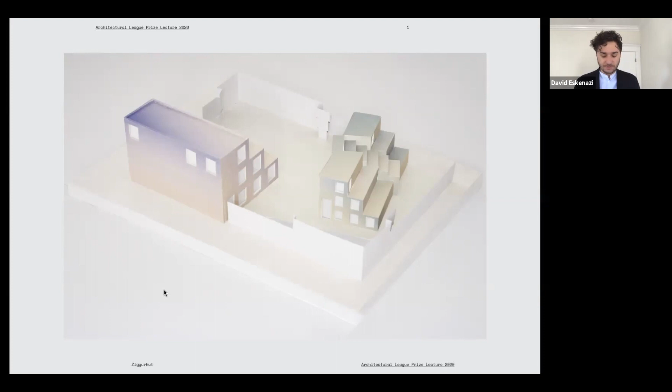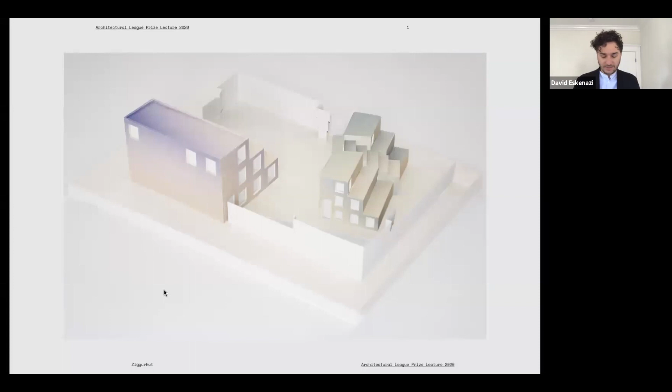The name Ziggurhut comes from the form of the ziggurats. In Yucatan, we find Mayan stepped pyramids, most famously Chichen Itza nearby. The step form is found in many diverse prehistoric societies, though only those in Mesopotamia are named ziggurats. The form interests me as a foreigner working in this area for its sense of universalism and specificity, the local and the global, and the sense of stepping as a kind of spatial ascension in a domestic setting.

The project began by thinking about the idea of scale in relationship to shape and human reference. Both houses are the same rectangular step form with windows and doors. In the left drawing, the houses are shown at the same scale. You can see that they're different sizes and that the windows are scalable, but the door, because it's specific to a human size, doesn't change.

On the right is a drawing showing the houses at the same size, drawn at different scales as a way to compare the similarities of shape in the sense that the door is size specific. This drawing I would call a zoomed working space, the space in which my practice designs. Human figures annotate the size while all things are zoomed to the same level.

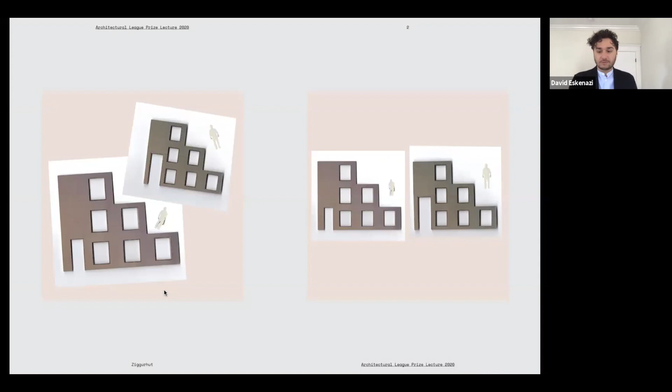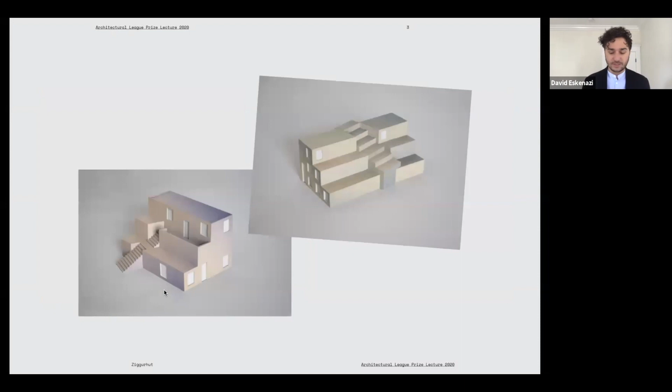Here are the two forms. The left is the main house, a two-story house that consists of a bedroom and living spaces, while the guest house on the right includes two bedrooms and a bathroom. They're both casually intersected by a stair. One stair you can walk up, and the other is a differently sized form of a stair.

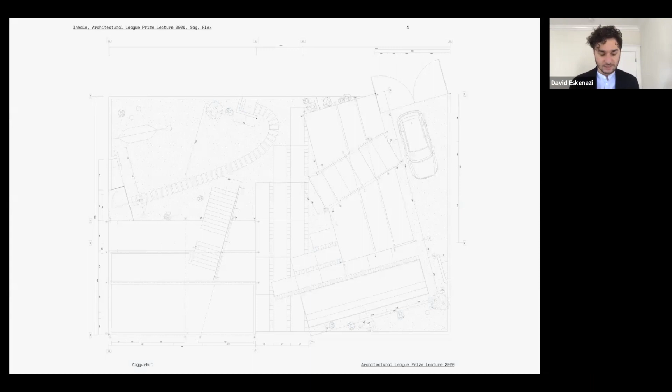Here in the ground plan, you can see the living spaces of the main house, the dining space, the kitchen, living spaces. You can also see in the guest house the two bedrooms and the shared bathroom. In the outdoor spaces, the pool, a space for outdoor dining, and a kind of garden in the upper left.

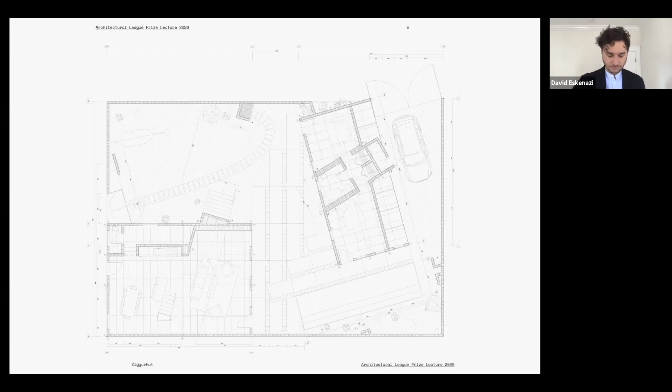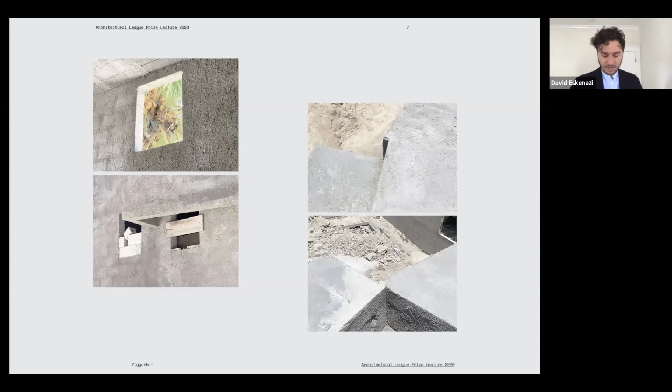The house is currently under construction. Here you see some of the details of the masonry construction. I especially love how the texture of the unfinished wall makes it seem woolly and soft in contrast to the exacting geometric intersections you can see on the right.

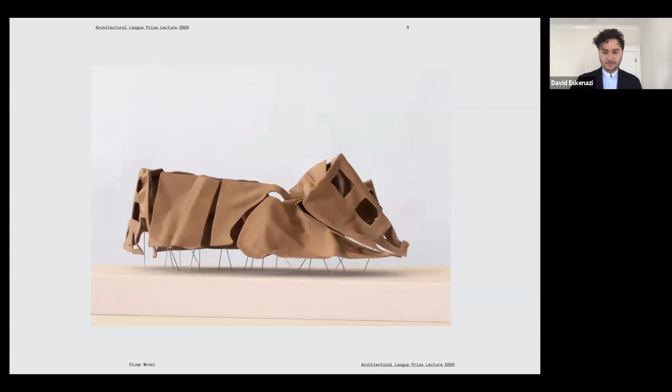While working on this project, I was invited to construct an installation at Woodbury University, where I chose to make a 1:2 scale model of the Ziggurat. This image is a photograph of a model built after the installation was completed, and I'll return to this in a minute. In thinking about the form of the stepped massing of Ziggurat, I thought of Robert Smithson's pointless vanishing point.

Smithson constructs a sculpture that reifies the three-dimensional space suggested by two-dimensional perspectival construction. The sculpture can be seen as a kind of material diagram that exists between the material, physical world and the conceptual space of a perspective drawing.

I thought that a model of the ziggurat would occupy a similar space, a material diagram, but I was interested in size, in the sense that Smithson's sculpture could be built at any size. Its physicality, while real, is not specific.

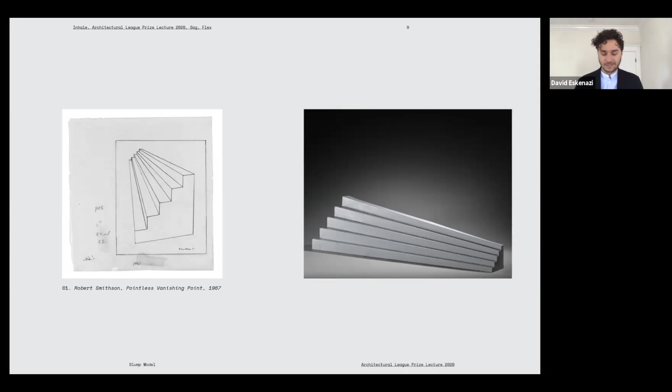We built this version of the Smithson sculpture based on the ziggurat, as you can see here, but now with a sense of specific materiality. It's constructed of loose kraft paper, letting it slump. Its form is size-specific and can't be scaled up or down. We named this installation Slump Model.

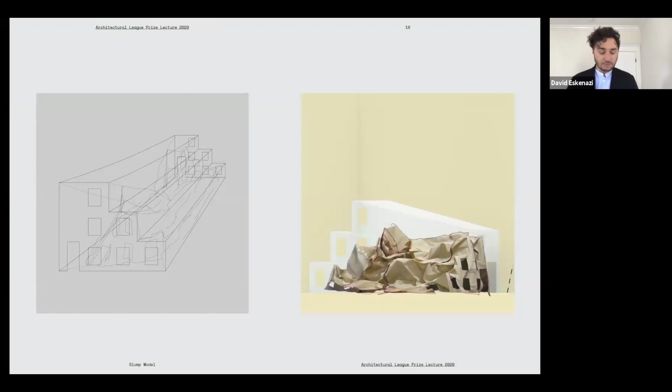Here are the different sizes of building the truncated step mass at different sizes of kraft paper. In the smallest on the left, you can see the paper generally keeps the precision of geometry. As the model gets bigger, approaching the size of the gallery on the right, you'll see the material lets go of its geometric rigor and slumps down.

In that version, you can really see how wild it gets. This is also the version where we add the windows and doors back into it.

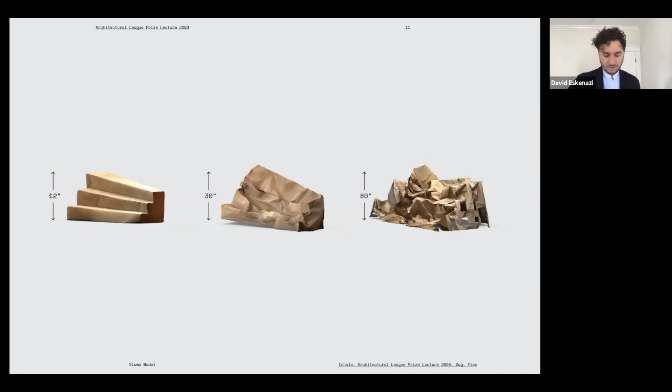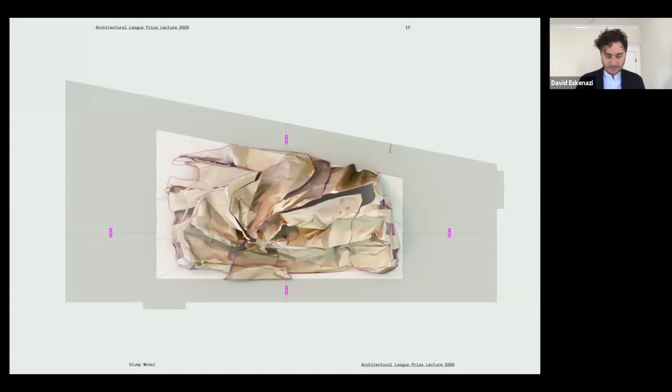The plan of the gallery at Woodbury takes after the gallery's name, the Wedge Gallery, which is a kind of perspectival construct. The model is formed to the plan and takes up as much space as it can while allowing for visitors to walk around it.

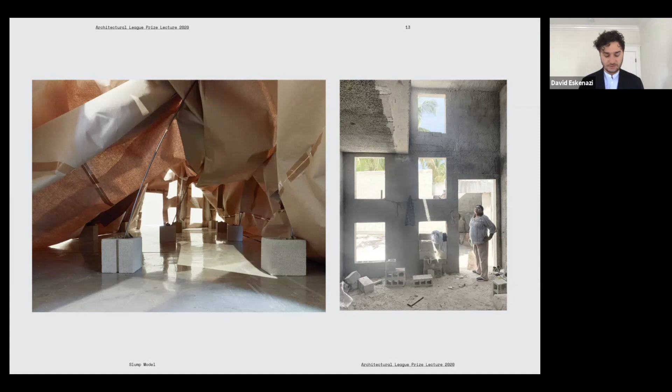This is the interior compared to a construction photo of ziggurat. There are tent poles resting in concrete masonry units that the paper rests on. In the back, you can see the smaller windows and doors, and it feels quite intimate compared to where the house kind of lands.

It recalls some previous conversations about paper architecture and the sense of the unbuilt in architecture as model. To me, this project opens up a new conversation within that world, one that suggests a closer look at the role of size-specific forms and the architectural models that would accompany them.

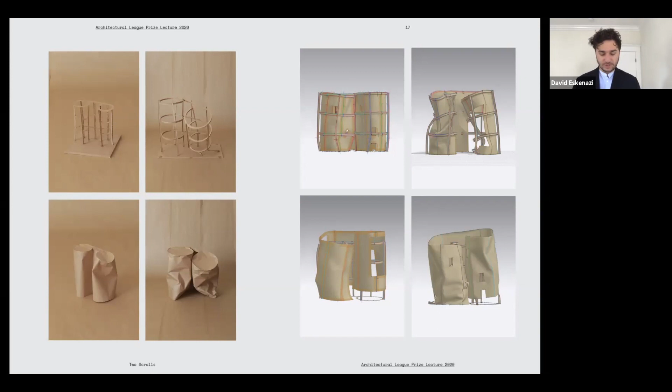Here's one attempt at putting all of these things together. This model is constructed of 3D printed parts from those digital physics simulations and from paper itself, which you can see hiding inside the model there. The windows on this model suggest that it represents a large building.

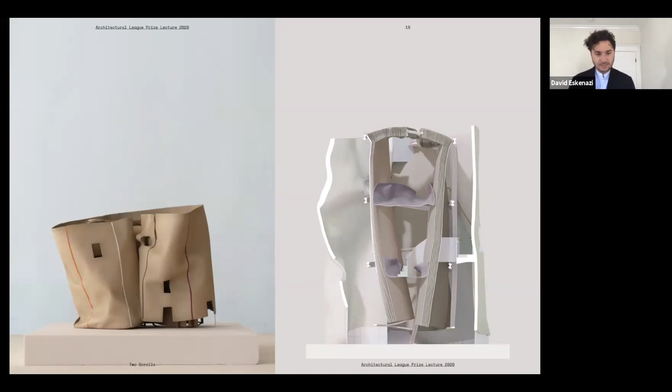You can begin to see some of the layers of this thing in the section here, which suggests stairs, floors, structure, and enclosure. In this alternate version, also made from those same tests...

we can see the same window is much larger, suggesting that this represents a much smaller building. Here, the exterior is an actual piece of paper, whereas the interior is a 3D printed simulation of a larger piece of paper. And in this section, we can start to see the stairs also seem much larger, but the elements of structure and enclosure are still present.

With the exterior shells removed, we can see that on the inside, the materials are reversed. What was paper on the exterior of the small building is a simulation on the interior, and vice versa for the larger building. These models are size specific. They can't be constructed at any other size, and their architecture is dependent on the performance of this model.

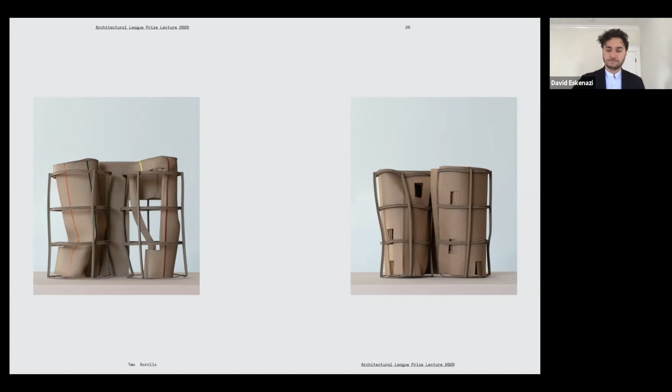I'll finish today just by showing some images from the online exhibition that you can find on the Architectural League's website. The exhibition shows a recent project proposal for a bathhouse in Los Angeles that builds on the ideas of this previous scroll project.

The project is titled Inhale, Exhale, Sag, Flex, and takes the form of two masses with opposing ideas of form and materiality. This exhibit displays a proposal for using city-owned lots in Los Angeles to develop flexible, easily fabricated public bathhouses.

The public bathhouse exists as an urban utility that produces an aura of collective imagination. Its primary function is to clean and relax bodies that are worked out in the city, but it's remembered as a space where foreign bodies care for themselves in a manner that is both personal and collective. Like the bodies within it, the bathhouse's architecture is continuously sanitized and maintained.

The proposal is composed of two buildings, the steam house on the left and the pool house here on the right, and they're separated by a stair. The steam house on the left, Flex, is enclosed by an expanding quilt of water bladders that fill up as steam evaporates and bodies exhale.

The pool house, Sag, is supported by a frame structure wrapped by building paper. The paper is periodically removed and dried once it's become too wet and soggy from absorbing pool splashes and shower steam. Both buildings are interior landscapes of curtains, pipes, water, steam, plunges, and bodies, where both architecture and people unrobe and collectively self-care.

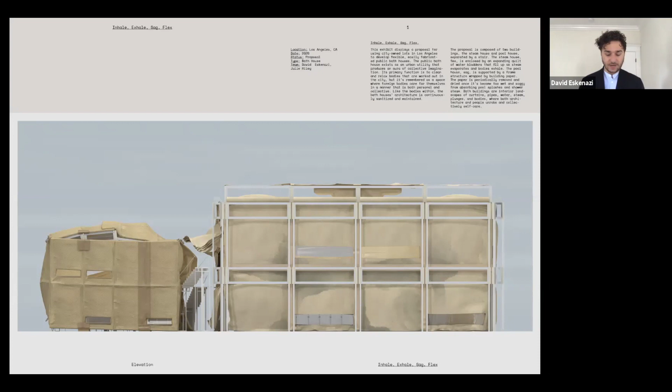Here in this section, you'll see on the left is, again, the steam house, and at its center is a large water bladder tank that contains all of the hot water for the building. It's expanding into the steam room above. And the enclosure of the steam house is also these water bladder tanks.

On the right is the pool house with a weight of water bearing down from its cold water tank on the roof and the pool on the second floor.

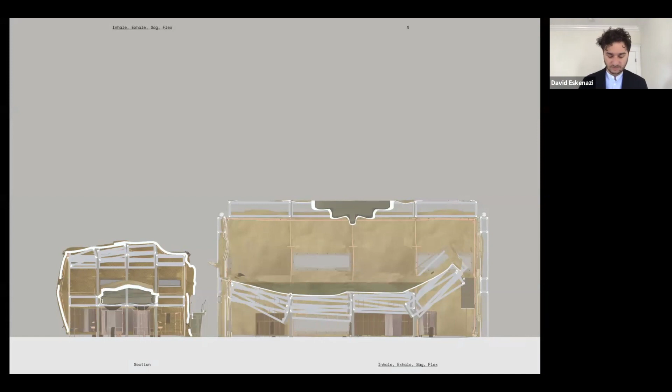Here is the ground floor plan. You'll notice there's no quote unquote front door, there's just an entrance to walk in. This is for the whole community. There's no permanent walls. Everything is thought of as material and infrastructure and is flexible.

Things are enclosed in curtains or through piping that might prevent somebody from walking through. At the center are the stairs and an elevator. And like I said before, the interior really produces a kind of landscape of showers, plunges, changing rooms, and toilets.

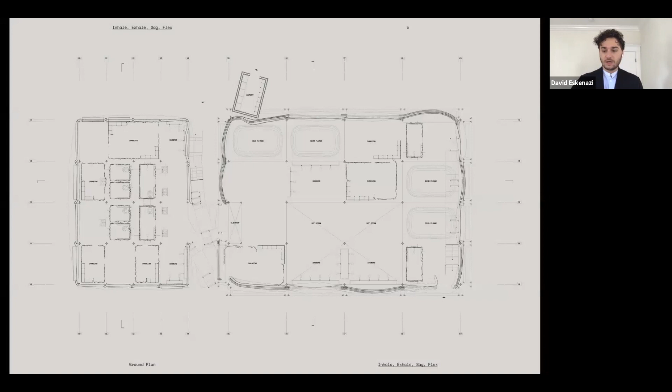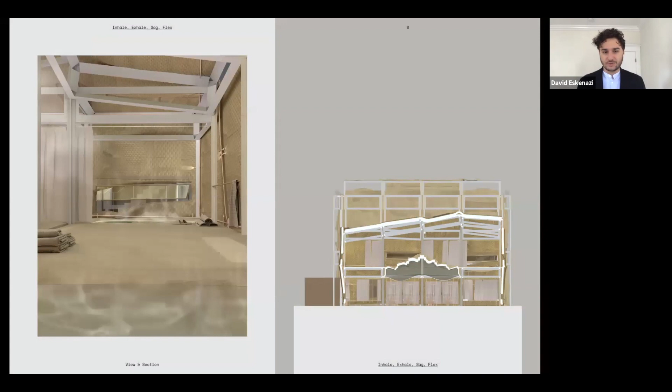So here's a view of the interior of the spa area. You'll notice the paper just kind of blends into the water itself, and the infrastructure, things like plumbing and electrical conduits are rendered the same way, and sort of construct a subsystem for enclosure.

In this section, you'll notice under the area where this perspective is taken is a proposal for changing rooms and bathrooms. And this is a view of the pool, which ends up feeling a bit like a beach. And again, in the section on the right, you'll see how the water's weight bears down in this pool house building called SAG.

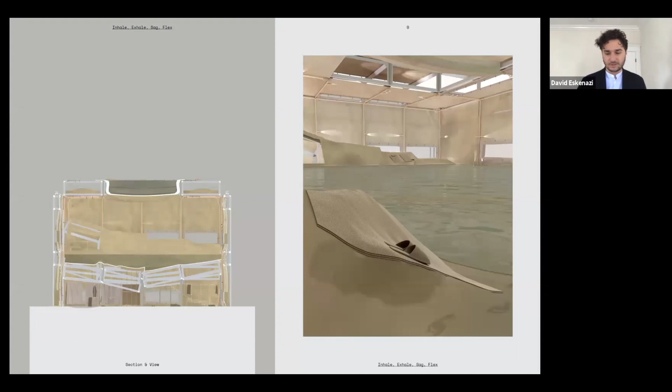These are some of the different infrastructures of the project, highlighting all the different material and structural systems. We also have some details we started developing for how we would construct this thing.

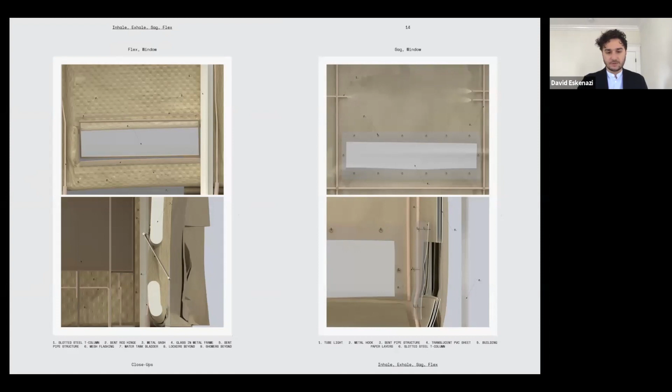On the right, for the paper, we would propose PVC plastic sheets that would cover the windows, whereas in the other building, we would have a kind of awning window that might swing.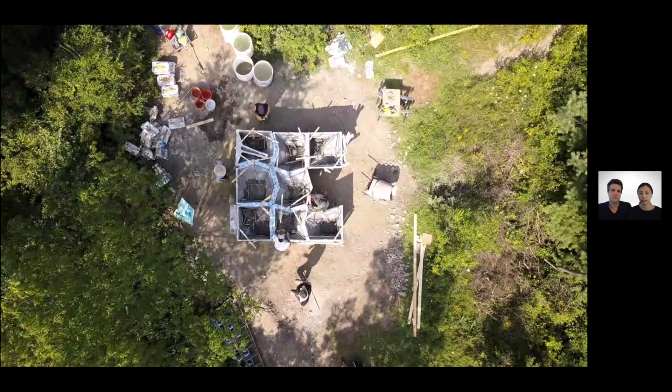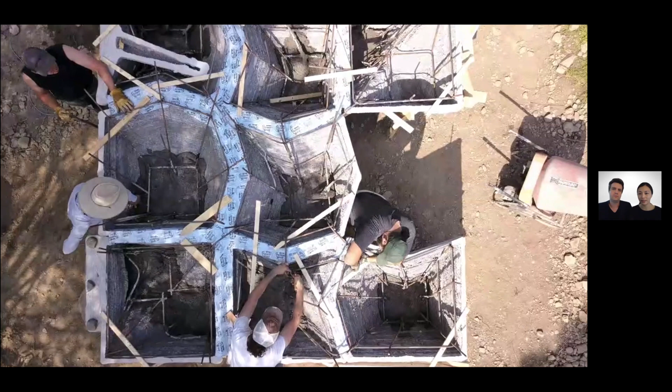At HANA, from the ground up, digital design and fabrication technologies are intrinsic to the making of our work, facilitating new material methods, tectonic articulations, environmental practices, technological affordances, and forms of sustainable construction.

In our research labs at Cornell, we build and embrace shared technology. In the past few years, we created open source construction machines, which we argue inevitably affect how we think and design through making at HANA.

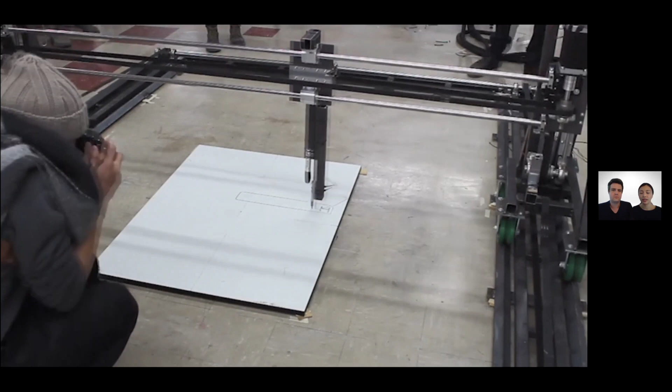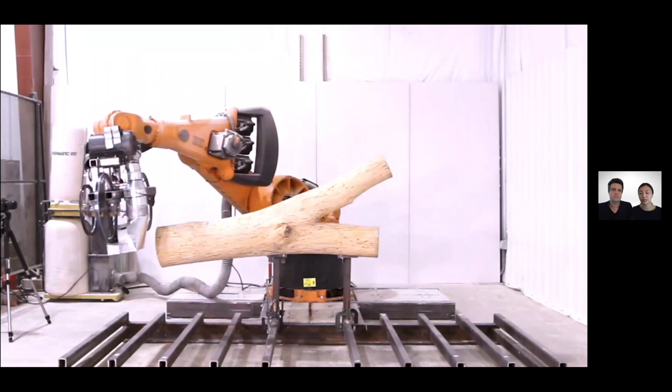In our work, we aim to mind the tension between machine means and architectural ends across scales. HANA does not obsess over technology for technology's sake. As designers, we consider ourselves to be biased generalists rather than specialists.

The various projects represented in this lecture inform form through a variety of methods of making, odd material applications, robotic routines, or socio-ecological narratives.

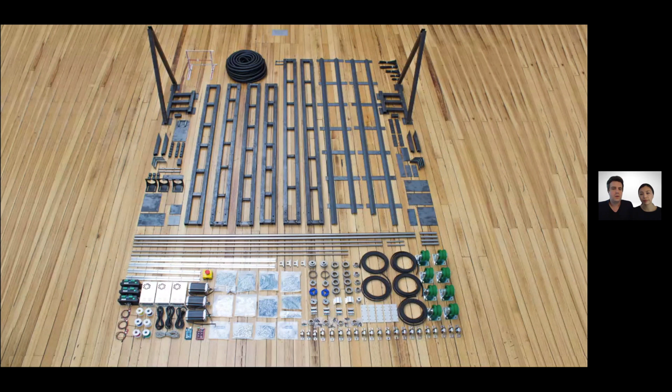We think that fully unpacking the manufacturing tool or machine is an exciting opportunity for architects to reclaim authorship over processes of construction, which fundamentally influence the way we can build, or perhaps ought to build, in the future.

While the machine is only a framework, our thesis is: with new tools come new architectural opportunities, not just in the research lab, but primarily in practice.

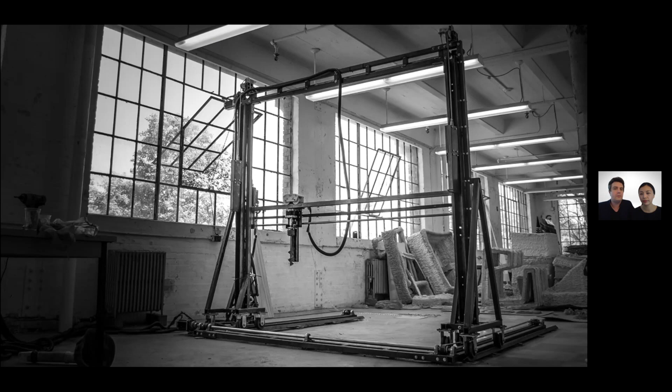However, in order to conduct research in advanced manufacturing and engage new methods of making, one needs the facilities, the means, and tools to do such work.

In 2016, we designed and developed a fully open source 3D printer at the Cornell Robotic Construction Laboratory. The printer cost about $6,000 to make and is now able to print full-scale building components in foam, recycled plastic, and concrete. For us, access to the tool opens the door to novel and unfamiliar architectural speculation.

In 2017, one year later, we purchased a 15-year-old used KUKA industrial robotic arm for $8,000 on eBay. The robot was formerly welding cars for GM at a manufacturing plant in Louisiana. And as with the printer, a certain amount of hacking is required to prepare this robot for architectural production.

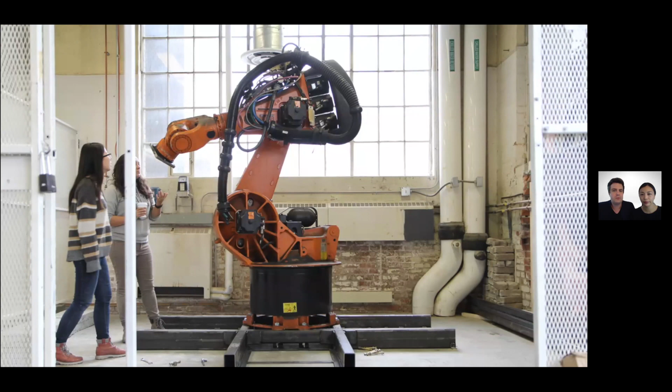Following principles of open source community information sharing, we believe that new technology comes with a social responsibility to make these tools broadly accessible to everyone. All information on how to replicate our tools is available for all through the Open Source Factory platform on the RCL website.

Our tools are never finished. They are constantly evolving with the architectural experiments we undertake at HANA. It took us about 3 months to develop a material mixture for concrete 3D printing.

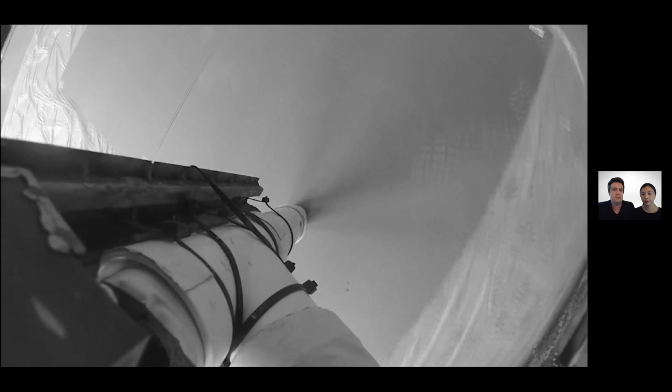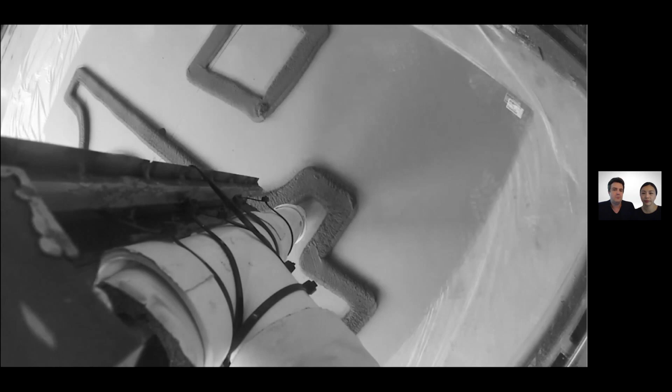And during this process, we discovered that the 3D printer, a machine which has long been characterized as characterless, because it can presumably print anything, is in fact exactly the opposite. It has plenty of character and a multiplicity of what we like to call productive constraints. Most of those constraints are informed by concrete rheology and gravity, which both became our printing frenemies.

Here you see a video of our first printing process, which we've done in the lab. You see that the machine essentially prints one layer after another. It's a kind of three-dimensional drawing.

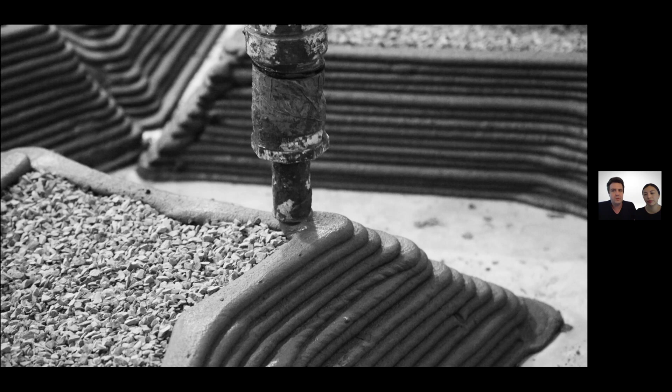In order to create three-dimensional form, the printer has to offset layers incrementally in a process very similar to structural corbelling. And this, of course, severely limits what we can print.

So rather than despair in the face of limitations, we see the manipulation of 3D printing rule sets as a tremendous opportunity to add design value. We think that concrete printing requires the development of an entirely new architectural language, which takes into account the limitation of the process as well as its performative advantages.

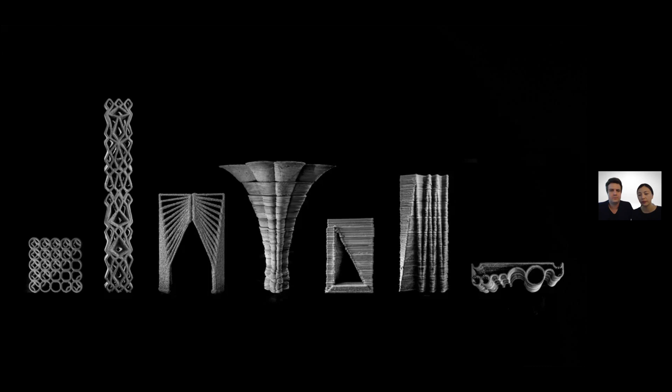So here in additive architectural elements, 3D printing concrete enables the elimination of wasteful formwork and prompts the reemergence of corbelling as an anachronistic structural strategy. For this project, we chose 7 prototypical architectural motifs to explore through the lens of the 3D printer.

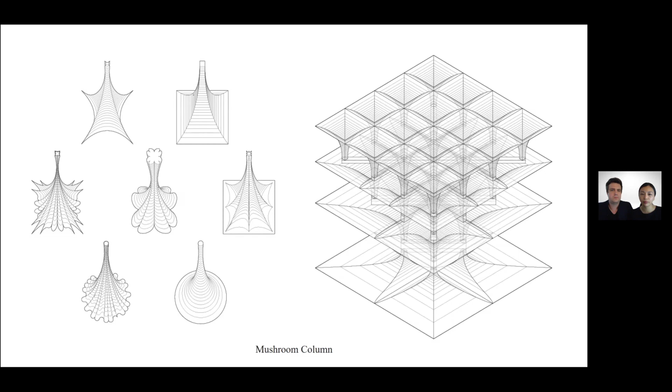Working first with the constraint of gravity, the mushroom column element embraces cantilever corbelling over support material by printing upside down, resulting in structural assemblies and horizontal striation that seamlessly transition between the vertical and the horizontal.

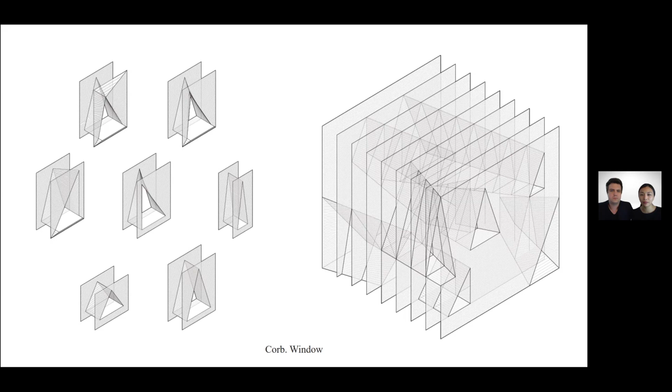We soon found out that the concrete printer cannot print in mid-air. Therefore, the simple task of creating a rectilinear window opening becomes seemingly impossible. In Corb Window, rather than drastically altering the process, for example stopping the machine to insert a beam, shortcomings become opportunities for design. So if you ask us, 3D printed windows have to be triangular.

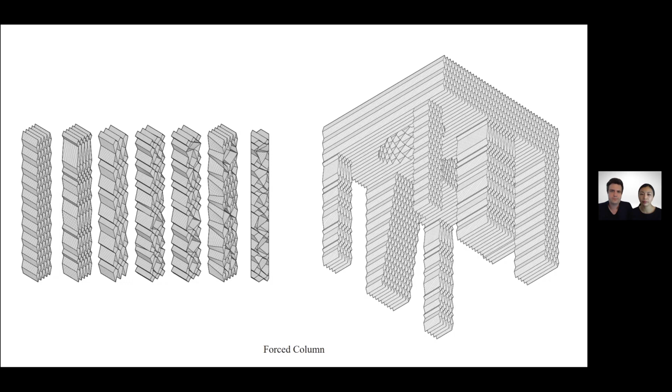The forced column element is printed in section, which allows for careful calibration of material densities and patterns. By depositing material where structurally necessary, the column can be optimized for forces and gravity, creating a type of transparent structural ornamentation.

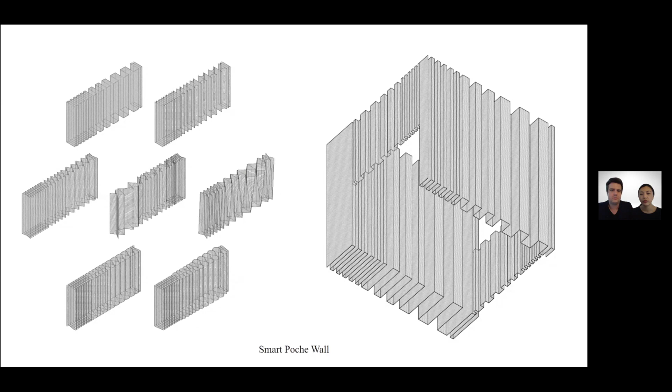Similarly, Smart Poche Wall explores a manipulation of concrete densities in plan, resulting in a wall which changes its composition based on structural, programmatic, or mechanical needs here.

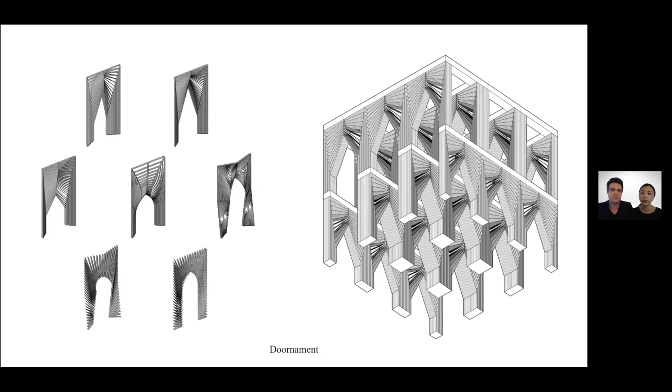The potential for excessive ornamentation is also investigated in the doornament, where the delamination of the layers you see here creates screen-like moments of transparency.

From a technical point of view, there is added economic and environmental value to 3D printing, which includes material savings, reduction of formwork waste, and the radical mass customization of components.

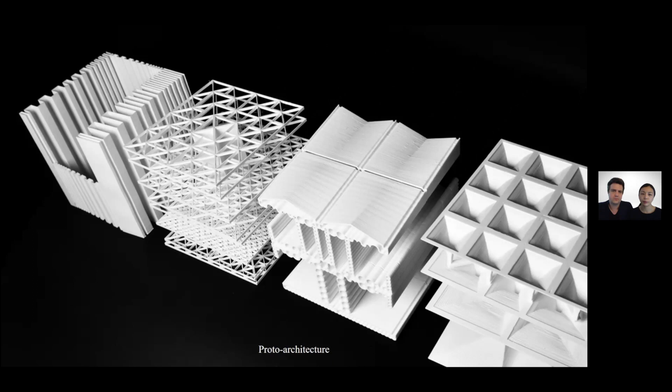However, there are severe shortcomings to working with concrete. The cementitious material itself has to change and become drastically more sustainable in order for 3D printing to become a viable future technology. While our concrete projects explore the benefit of 3D printing, we as designers have a responsibility to dig deeper and constantly challenge the materials we work with.

So jumping scale from building elements to furniture, our next project here takes full advantage of the printer's ability to economically mass customize geometries and create a range of tailored seats for a variety of body types. The Rolling Stones project is the winning design of the Folly Function competition in 2018.

The design is deeply informed by program, and in this case is public seating. The competition brief called for a design that could be movable by visitors and staff, but solid enough that visitors are discouraged from removing it from the park. So with concrete gravity working in our favor this time around, we had the second part covered from the get-go.

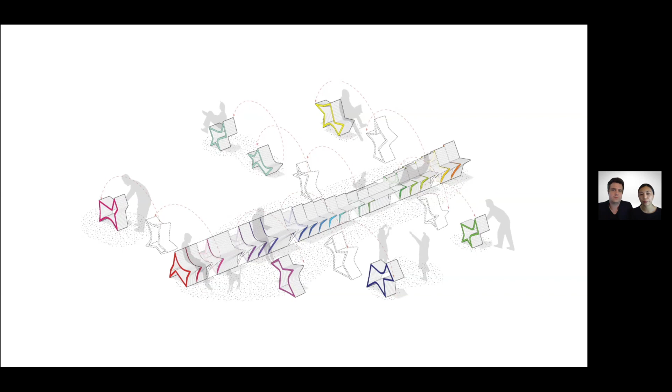Leveraging movement architecturally and its folly itself, the playful design encourages creative interaction and allows park visitors to discover a variety of seating configurations while moving the seats across the lawn. Responding to scales within the park landscape, the Rolling Stones can form long continuous bench, aggregate into smaller benches, or disperse to form solitary compositions.

And each seat has 3 configurations. Some enable a more upright seating position, while others animate lounging and relaxation.

In Rolling Stones, 3D printing with concrete enables the creation of 25 affordable and self-similar, but ultimately entirely individual seats. And no longer bound to the relentless paradigm of standardization, 3D printing opens the possibility for design freedom, customization, and individuality. As is evident in this photo, concrete is indeed hard to steal or throw.

So on to another type of loop. Environmental cycles, birth, growth, and decay are intrinsic to complex forest ecosystems and processes. Conceptually and spatially, the LogNog project references these eternal cycles and reciprocal relationships between systems, both natural and technical.

LogNog was designed in collaboration with Brian Havener at RCL and is a project that emerged from our first initial exploration with custom wood-based tools for the robot. It enables the construction of complex timber curvature with raw material and minimal formwork. In a reciprocal design process, the project fosters synergies and feedback between material, fabrication, digital form, and full-scale construction.

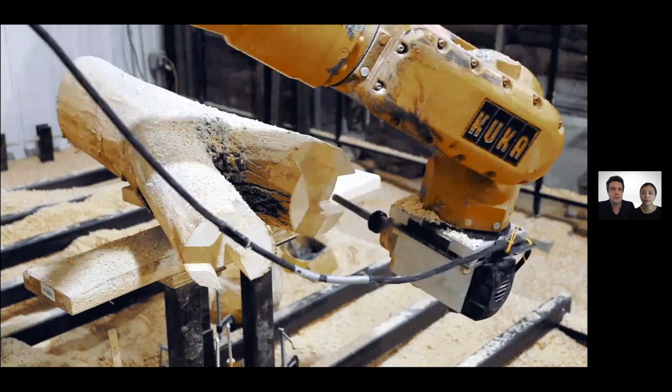Small roundwood members or tree forks are usually not used for construction because today's sawmills are not equipped to process irregular tree geometries. But with a robotic arm and 3D scanning, we can process irregular trees and roundwood members.

The mortise and tenon joints for LogNog are milled in 4 separate operations from rough pass to finishing cut, using both the tip and the side of the milling spindle bit. The project uses computation to optimize each joint for moment forces. While they all look the same, each of these joints is precisely rotated and calibrated to resist local torsion.

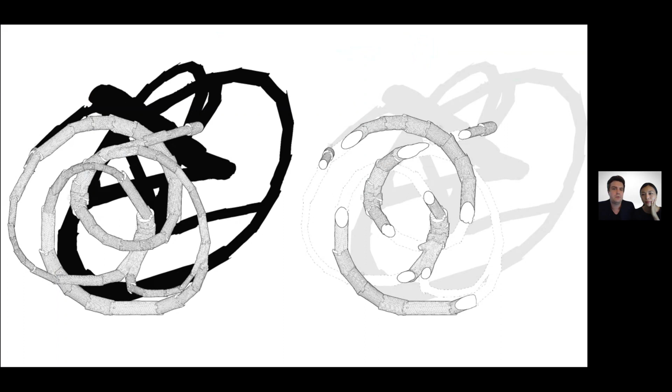Working with small budgets, we did not have access to heavy machinery, and therefore developed a self-sufficient construction method that requires minimal formwork or support during the construction process.

Unfamiliar notions of craftsmanship and precision, both digital and analog, emerge from LogNog's conceptual design practice and construction technique. By questioning how forests are used as a resource, LogNog provides a critical commentary on various perpetual wood cycles, economic, environmental, and cultural in nature.

Our last and latest project, Ashen Cabin, also has some similarities to the previous project and shares its forest heritage. That project follows two material narratives and is a culmination of HANNAH's applied design research as a critical practice.

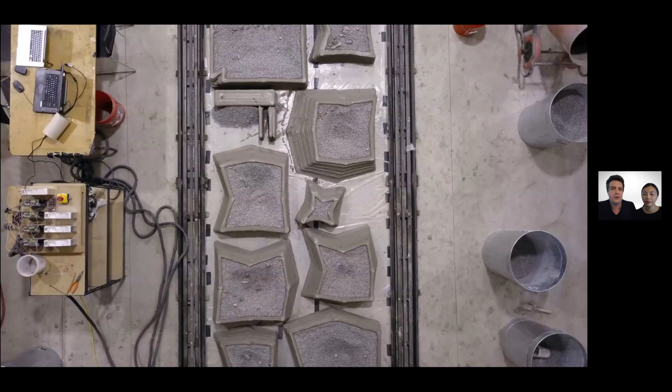In the first material narrative, the project aims to reveal 3D printing's idiosyncratic tectonic language by exploring how the layering of concrete and the act of corbelling can suggest new strategies for building. The cabin was built in two phases: in 2017 we did the concrete, and then in 2019 we did the second part, which is a wooden envelope.

The cabin is printed in components that function as sacrificial zero-waste formwork for the main structure, eliminating substantial construction waste. The formwork is printed in small sectional modules to be transported and assembled manually at the remote construction site. In this project, we developed a new building process reliant upon 3D printed formwork and cast-in-place concrete with custom rebar. Here's a top view of the structure with the rebar cages.

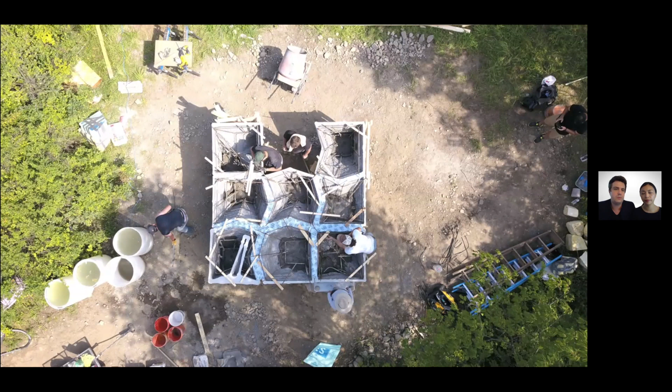In this hybrid building process, unfamiliar tectonic expression is generated by the fabrication method and materiality. For example, the G-code and print path become visible as the ornamental pattern of the 3D printed floor slabs. Through corbelling, horizontal layers seamlessly transition from the leg to the slab and then into the chimney.

Gently adapting to the site, the concrete structure lifts off the ground on legs which adjust to the sloped terrain. It is characterized by three programmatic areas: a table, a storage seat element, and a 21-foot tall fireplace.

The second material narrative focuses on a robotically fabricated wood envelope and is informed by a key environmental crisis of the ash trees in North America. The emerald ash borer is a small beetle whose larvae hatch underneath the tree's bark and cut off vital layers that transport nutrients throughout the trunk.

This invasive EAB currently threatens to eradicate most of the 8.7 billion ash trees in North America, and it has drastically transformed our entire forest ecosystems in the process. As a reference, almost every 10th tree in New York State is an ash tree. The EAB infestation is a huge environmental problem and climate risk.

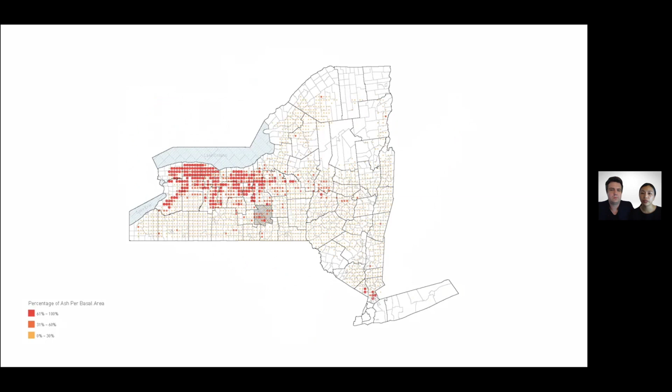Challenging preconceived notions about material standards in wood, the cabin utilizes infested wood for its envelope, which unfortunately is widely considered as waste. Each of the 10 trees we use in this project is worth only about 25 cents. Due to their challenging geometries, many infested ash trees cannot be processed by regular sawmills and are therefore regarded as unsuitable for construction.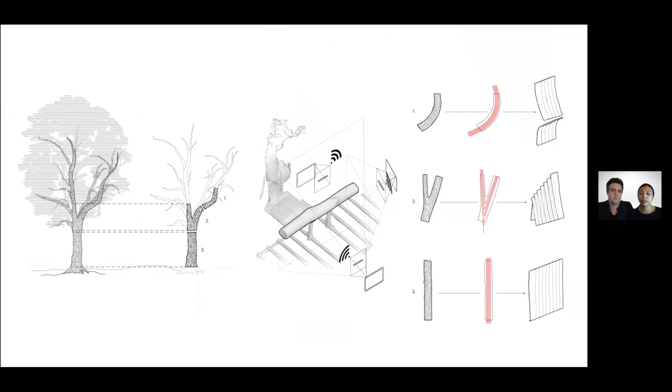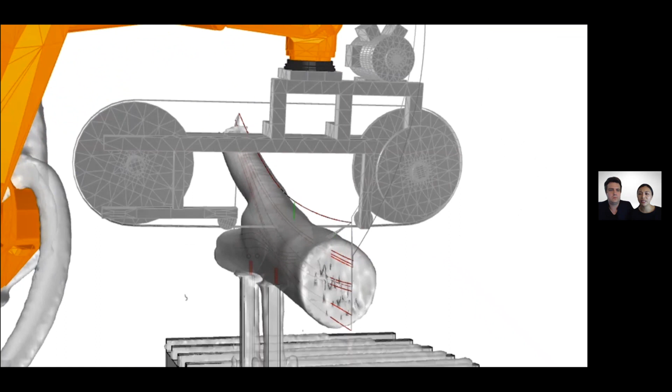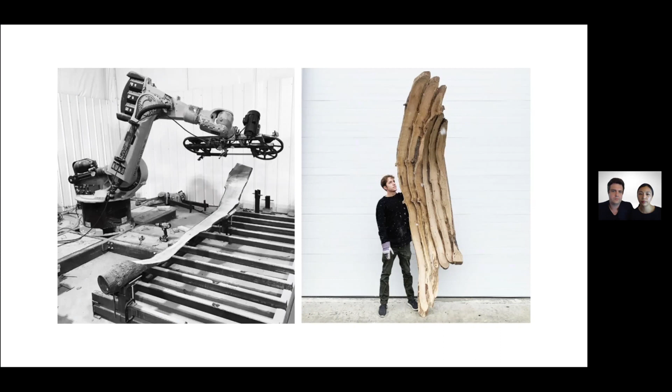Using the robot with a custom bandsaw end effector, we can slice irregular tree logs into naturally curved boards and strategically assemble the boards to form different surface conditions, which then inform the design of the building and vice versa.

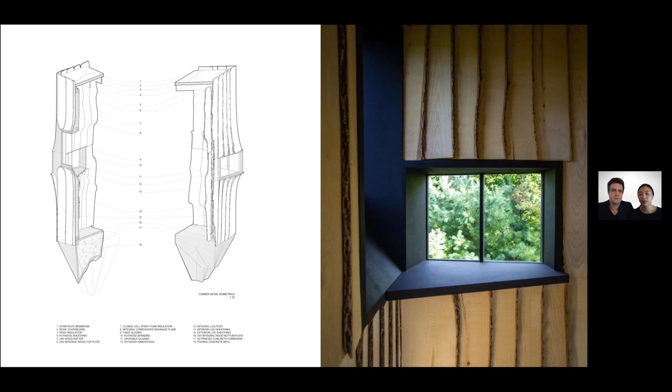The sliced boards are arrayed into interlocking SIP facade panels, and solid offcuts can be structurally integrated into the assembly, which then results in a minimum waste fabrication method.

As you see here, the facade assembly is actually fully ventilated, detailed to manage shrinkage, and it does not require an additional rain screen.

Architecturally speaking, the Ashen Cabin walks the line between familiar and unfamiliar, between technologically advanced and formally elemental. The undulating wood surfaces accentuate the building's program and yet remain reminiscent of the natural log geometry from which they are derived.

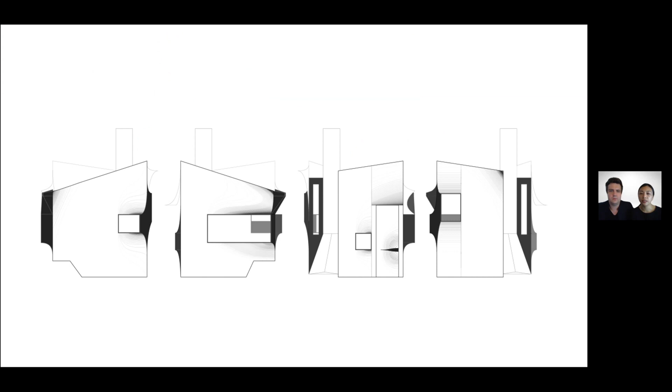The curvature of the wood is strategically deployed to highlight these moments of architectural importance, such as windows, entrances, roofs, drain scuppers, or canopies. On the inside of the cabin, we use predominantly straight log sections to create a contrast between the exterior and interior.

So no longer bound to the paradigm of timber standardization, this project revisits woodcraft and design based on organic, found, and living materials. The cabin combines a variety of fabrication methods, material applications, geometries, and types of construction.

We believe that using newly invented forms of making from the ground up, at the scale of a building, affords unfamiliar and exciting design opportunities. At various scales, the cabin's performance, structure, and architectural expression are inherently derived from its digital construction protocols, robotic routines, materiality, and design logics. At the same time, in a mix of means, the project is inspired by precedent, history, program, ecological considerations, personal obsessions, and the creative misuse of technology.

Together, the various and sometimes conflicting means, robotic or otherwise, inherently inform the creation of architectural expression and value within our work.